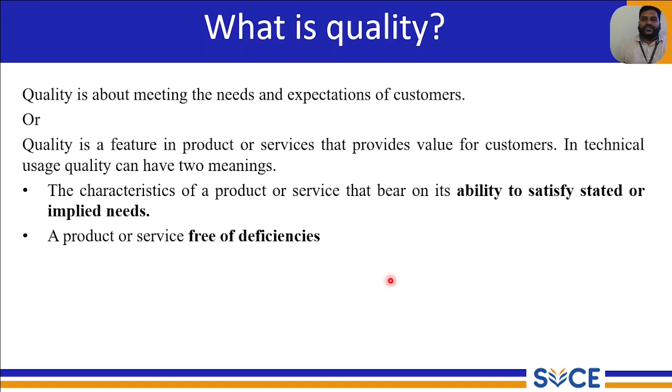There are 8 dimensions for product quality management, which is used at a strategic level to analyze the quality characteristics. The first one is performance, followed by features, reliability, conformance, durability, serviceability, aesthetics, and perceived quality.

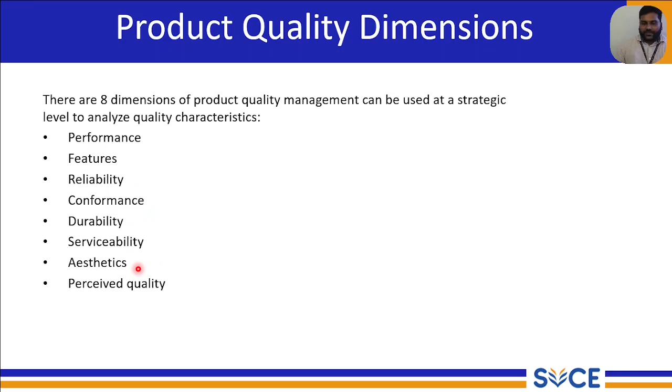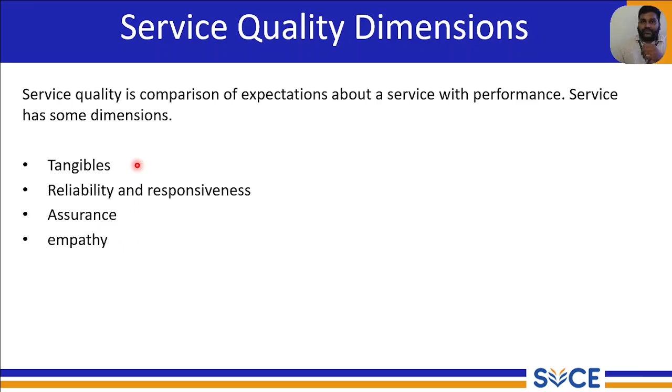Now we'll see the service quality dimensions. It is basically led by tangibles, reliability, responsiveness, assurance, and empathy. Tangible means it is quantifiable, so that the service is delivered in a better management system.

What is the advantage of having good quality? For businesses, it can gain competitive advantage, satisfy shareholders, increase business growth, increase customer satisfaction, support business strategies, reduce the risk of business failures, reduce employee turnover, increase employee motivation, and provide critical learning experiences. These are the advantages when you see it in the business organization.

With respect to consumers, good quality reduces the risk of facing troubles. As a customer, avoiding products with deficiency is a much better advantage for us. It gains value, what the customers really want, gains fairness to the price they paid, and can increase their satisfaction, which in turn can reduce extra expenses for the consumers.

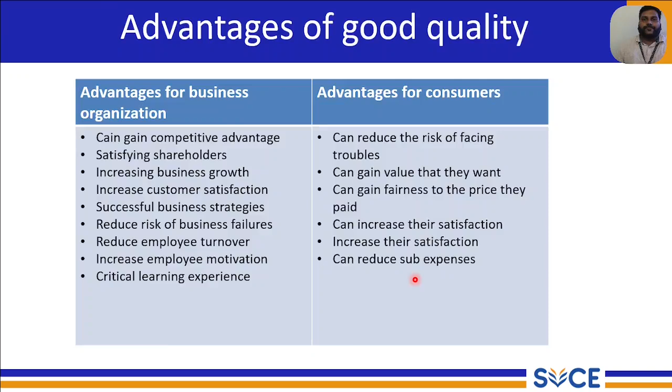What is the cost associated with quality? When you talk about quality cost, it has conformance and non-conformance. Conformance includes prevention cost and appraisal cost. Non-conformance includes internal failure cost and external failure cost.

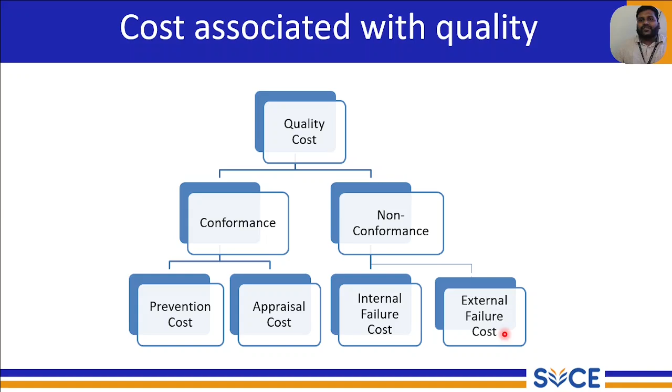Non-conformance is mainly associated with the design of the product or the service rendered for the product. The internal failure cost occurs within the industrial organization, within the manufacturing unit itself. The external failure cost occurs when a product does not meet its life expectancy - that is called external failure cost.

When you talk about manufacturing process and development strategy, it has two main categories: strategic goals and tactical goals. We'll start with the strategic goals.

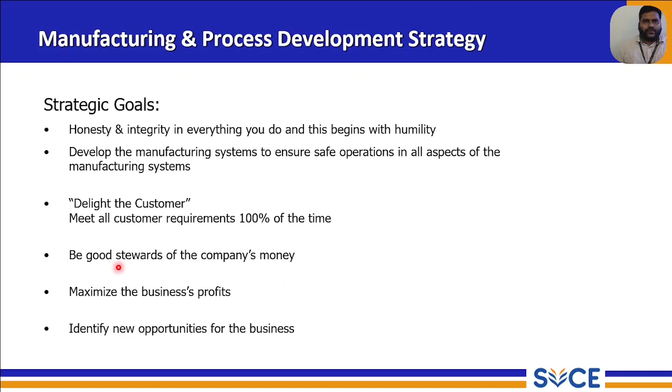Honesty and integrity in everything you do, and this begins with humility. Develop manufacturing systems to ensure safe operations in all aspects of the manufacturing systems. In order to do that, we need to delight the customers and meet all customer requirements 100% of the time. Be good stewards of the company's money, maximize business profit, and identify new opportunities for the business. These are the generic strategic goals which every management system follows.

Following that will be the tactical goals. There are separate segments here. First we'll see operating safely. Safety is everybody's job, all the time. Be constantly aware of what is going on in the system.

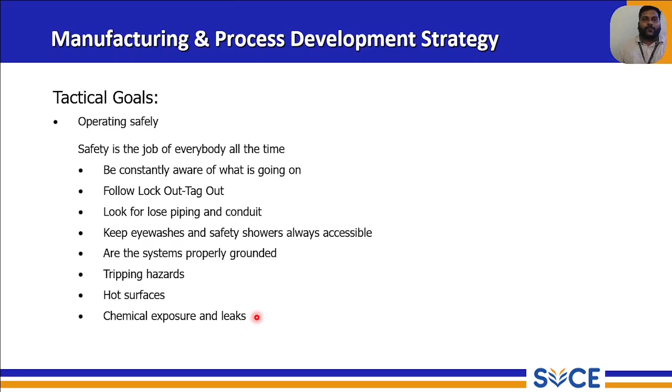Follow the lockout or tagout systems. Look for loose piping and conduit, and ensure safety showers are always accessible. Be aware of systems that are properly grounded, and of tripping hazards - tripping hazards mainly make the system foolproof. Also check whether any hot surfaces, chemical exposure, or leaks are present within the systems while operating. Operating safely is one of the key phases in tactical goals.

Following that, eliminate or minimize non-value added steps. In any manufacturing system, a non-value added step is an activity that adds cost to the business without adding value to the business. But it is non-negligible - it can be reduced, but cannot be completely eliminated.

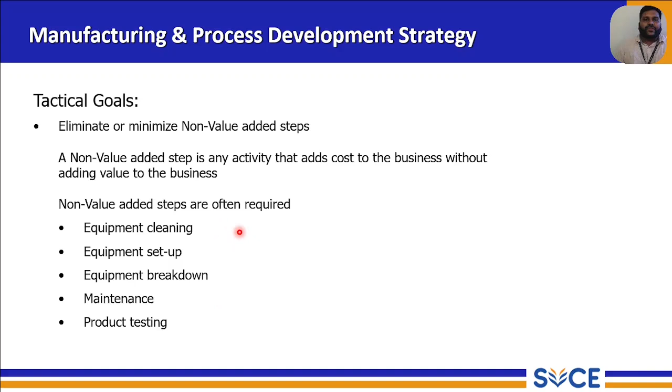The basic non-value added activities are equipment cleaning, equipment setup, equipment breakdown maintenance, and product testing. All these activities are necessary but don't add value to the product system, though they could be reduced to save time.

Following that is cycle time. Cycle time means the entire production time taken for one particular product from the initial stage to reaching the quality checkup stage.

How to minimize the cycle time? Eliminate or minimize non-value added processes like setup time. Find the slowest step and work on it until it's no longer the slowest step - that is, we have to find an optimal value. We cannot go much slower or much faster; we have to find the optimal value required for producing a product.

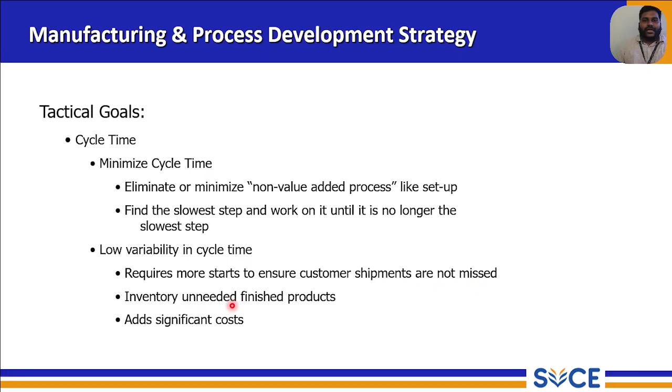Low variability in cycle time requires more starts to ensure customer shipments are not missed. Inventory of unneeded finished products adds significant cost.

Improve the equipment uptime. For product changeover, keep required tools and materials ready. Downtime maintenance has to be planned at initial stages. Unplanned downtime and machine crashes have to be reduced so equipment uptime improves at a higher rate. We have to plan for unplanned downtime within the system, accounting for preventive maintenance.

Following that will be the cost. Track it on a continual basis. If costs are highly variable, profitability cannot be assured and it becomes difficult to reduce manufacturing cost. So track the cost and make sure it is not variable, done on a regular basis.

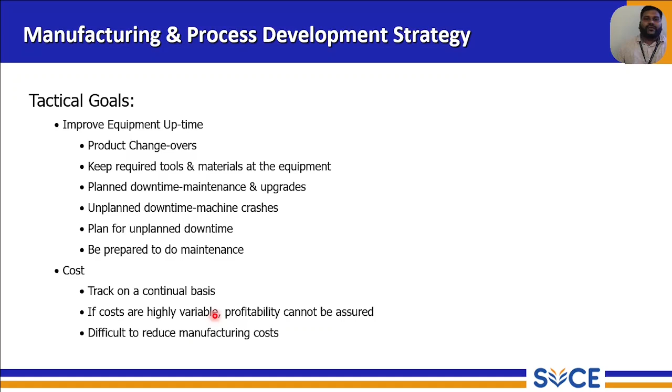Finding the tactical goals means finding the hidden capital and non-valued steps. Maintenance is an engineer's best friend, a key phase in the engineering aspect. Always be prepared for maintenance, machines do go down unexpectedly, because we cannot expect this every time.

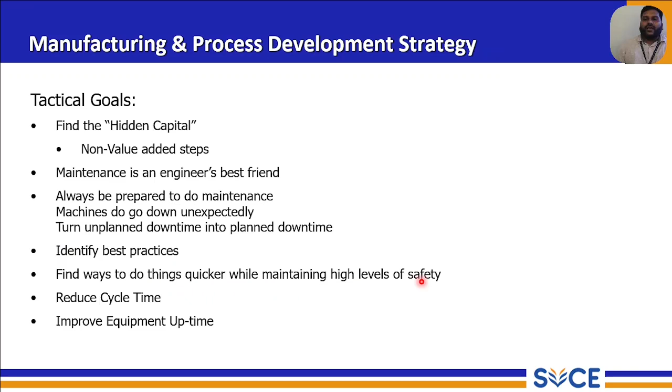Turn unplanned downtime into planned downtime. This is one of the preventive actions in manufacturing. Identify the best practices, find ways to do things quicker while maintaining high levels of safety, reducing cycle time, and improving equipment uptime.

Problems often occur over time. When we work overtime, we have to keep tracking key metrics like capacity utilization, cycle time, product quality, energy use, and material utilization, which are critical aspects. Graphing this data helps identify trends, and when unplanned breakdowns happen, we can identify them from the data. These things will be stated from the Pareto chart.

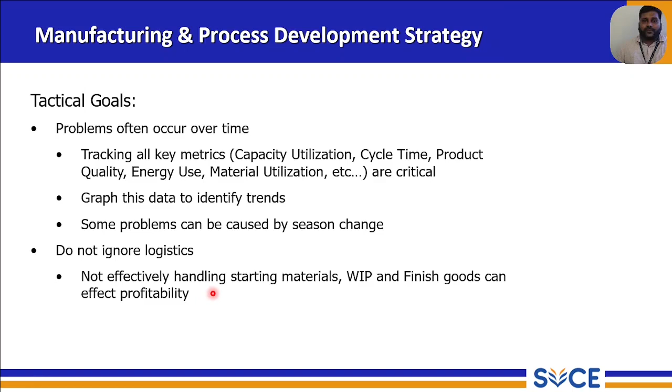Some problems can be caused by seasonal changes, but that has to be taken into account. We should not ignore logistics, which effectively handles starting materials, work in progress, and finished goods, affecting profitability. Logistics comes at every stage of the process, from procurement to raw materials, from one system to the next, then to quality, to the warehouse, and finally to consumers.

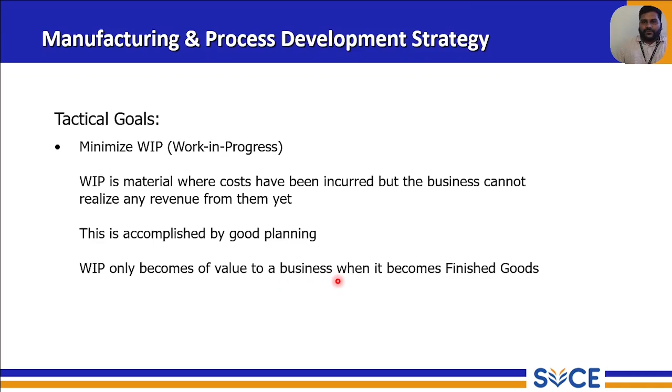So logistics cannot be ignored at any time. Minimize the work in progress. Work in progress is material where costs have been incurred, but the business cannot realize revenue from them yet. This is accomplished by good planning. Work in progress only becomes valuable to a business when it becomes finished goods.

What is the power of capability analysis? Understanding Cp/Cpk allows for quick identification, classification, and prioritization of problems in the system. Understanding them is a key phase. Repeatability studies should be done on all process and product measurements.

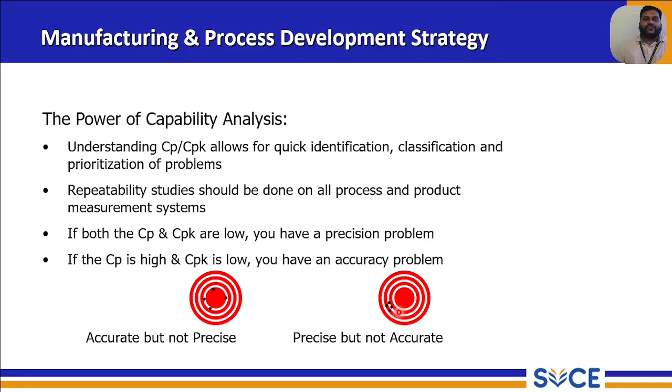If both Cp and Cpk are low, you have a precision problem. Here we have two sets of diagrams showing accurate but not precise, meaning it is accurately doing that but not precise at the moment. Over here, it is precise but not accurate. So the system has these two states of problems which can be identified through power of capability analysis.

It prioritizes the issues for us. Precision problems must be resolved before accuracy problems. Excessive variability in incoming material, processing conditions, equipment operation, and process or product measurement systems across space and time are the areas where we look for precision problems and how they have to be assessed. Accuracy problems are solved by optimization studies using designed experiments.

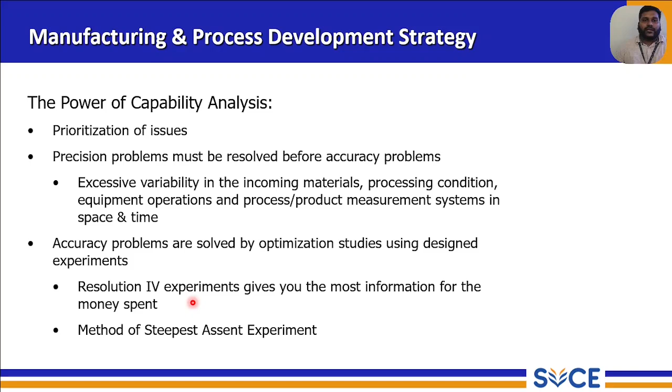The method of steepest ascent experiment, a resolution IV experiments, gives you the most information for any money spent. This is like having a prior run of the system so I can correct the accuracy problems. Followed by cost reduction.

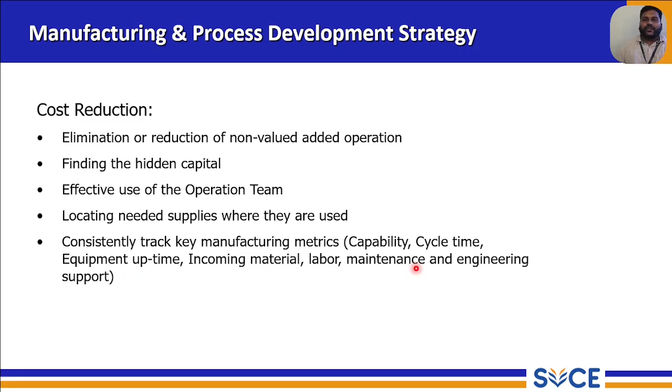Elimination or reduction of non-value added operations is mostly important for cost reduction. Finding the hidden capital involved, effective use of the operation team, locating needed supplies where they are needed, and as we said, consistently tracking key manufacturing metrics like capability, cycle time, equipment uptime, incoming material, labor, maintenance, engineering, and support. All these factors have to be taken into account.

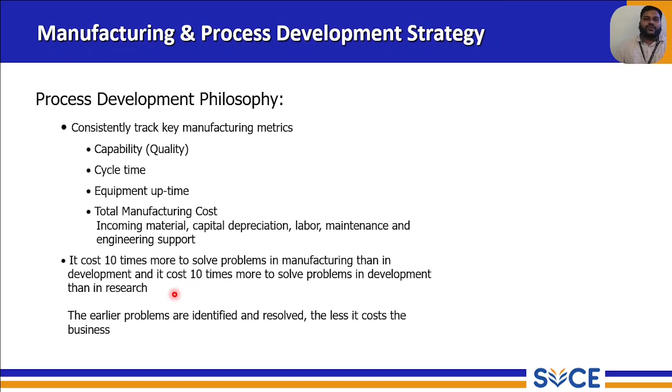Following that, we have to consistently track the key manufacturing metrics as we said. It costs 10 times more to solve a problem in manufacturing than in development, and it costs 10 times more to solve problems in development than in research. So 10 times the 10 times is 100 times. The earlier problems are identified and resolved, the less it costs the business. When we talk about identifying and solving the problem, identification alone consists of 70%, while only 30% is spent on solving the problem.

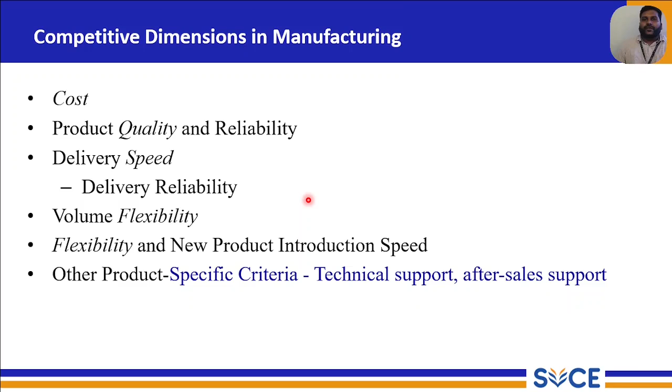So in this video, we are seeing the aspect of manufacturing and quality with respect to procurement. Thank you. Following that will be part 2 of the unit. Thank you.